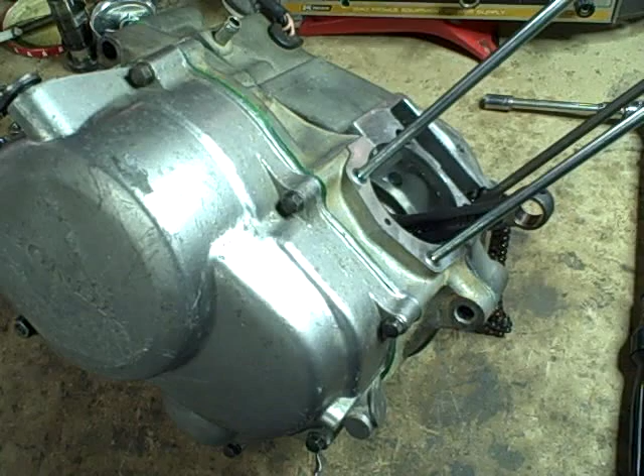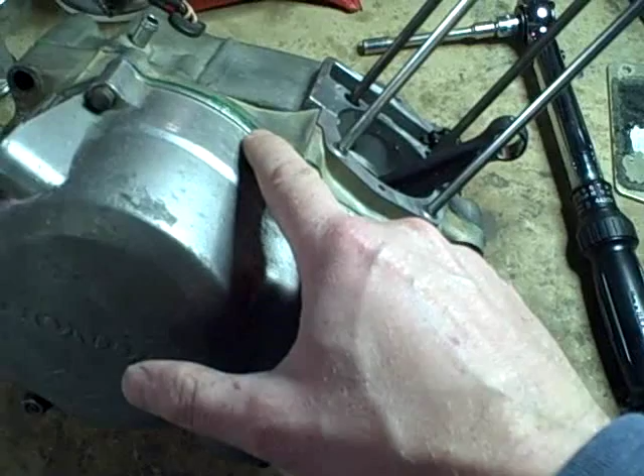Time to finally get back to work on the XR100. Going to start assembling the top end today, or tonight I should say. Last thing I ended up doing on this thing was after the RTV sealant set up, I gave a final torque to all of these small bolts right here, and those get torqued to 10 Newton meters or 7 foot-pounds, which is like 84 inch-pounds. So now I'm going to get ready to assemble the cylinder.

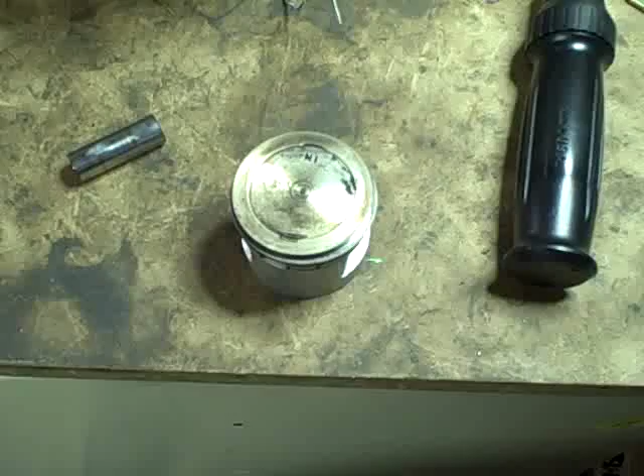Alright, so the first thing I need to do is I need to remove the old piston rings. Okay, I've removed all the rings, and now I've cleaned the carbon off the top of the piston. The rest of the piston looks like it's in pretty good shape. I'm not going to bother miking it because no matter what I get, I'm going to reuse this piston because I'm doing a cheap repair on this bike. Don't want to sink much money into it.

Anyways, next step I want to do is I want to clean the grooves for the piston rings, and the easiest way to do that is to take an old piston ring. I'm going to snap one of these old piston rings and use it as a scraper to get in there and get any carbon that might be in those grooves out, although it doesn't really look like there's any sign of it, but we'll do it anyways.

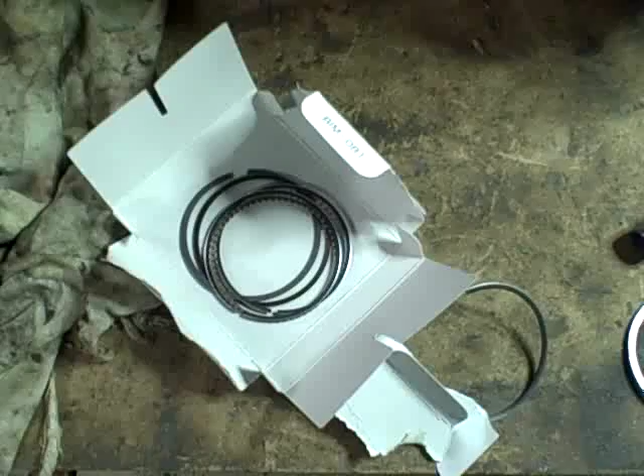When I've done piston ring replacements before and bought the sets, they were nice enough to individually wrap the rings in separate envelopes indicating whether it was the top ring or the second ring. Here they're just all thrown together in one little pile, so that's not going to tell me anything. And then to make matters worse, it does appear like there is a difference between the two rings here. One ring looks like it's of a different material, or at least has a coating on it that's different than the other ring.

Okay, just looked at them under magnification, and it's very hard to see, but there's a tiny T near the ring gap here on each one of these. So I'm going to make the assumption that T stands for top. So that must tell me which side faces up. Now I've just got to figure out which one of these rings is which. So I'm going to clean up the two original rings and see if I can see a difference.

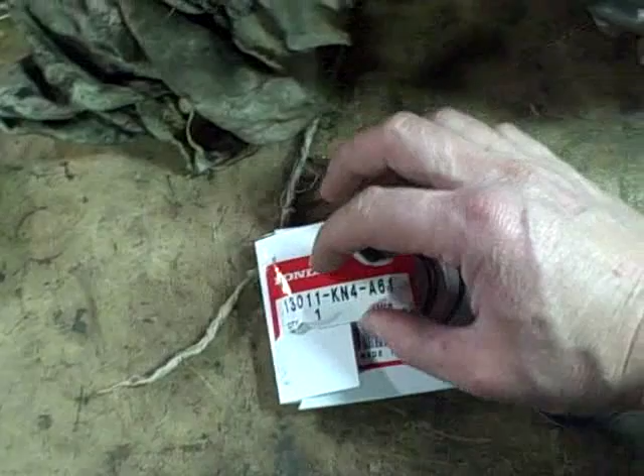So now I've got to go and double check and make sure that I got the right rings, because if I didn't, then I think the 23 bucks I spent on rings is going to be wasted. So I've got to double check this part number, 13011-KN4-A61, and make sure that these are the correct rings for this bike.

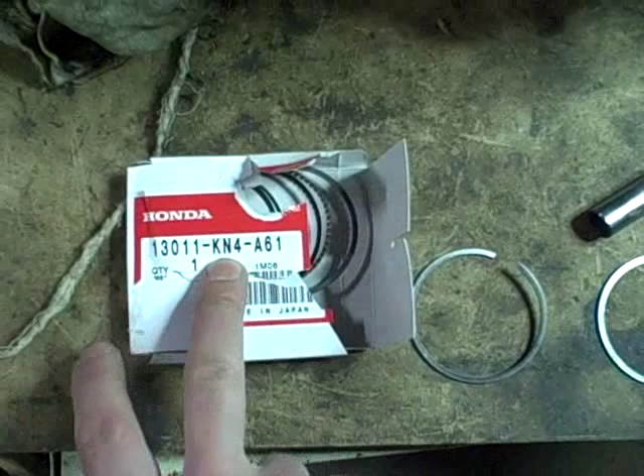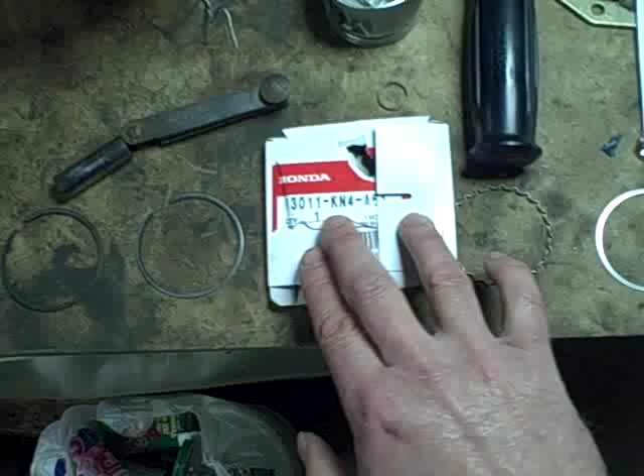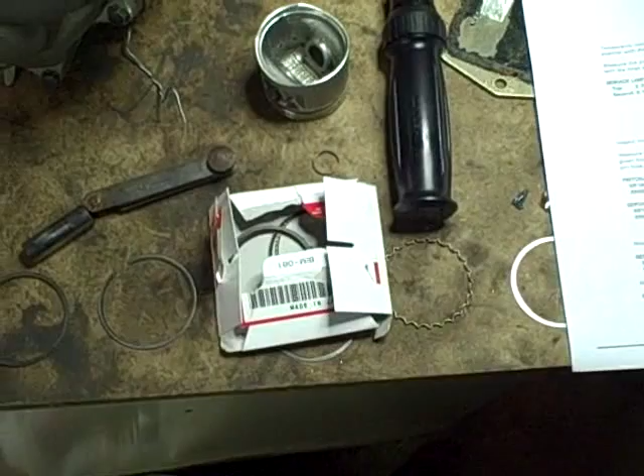Well, it looks like I got to the bottom of this piston ring problem over here on this XR. These piston rings that I had ordered, the 13011-KN4-A61s, are supposed to be the correct piston rings for a 2003 XR100. From 2001 on up through the whole XR100 lifespan, even when they changed over to the CRF100, they used these rings. Back in 2000, they used a different ring.

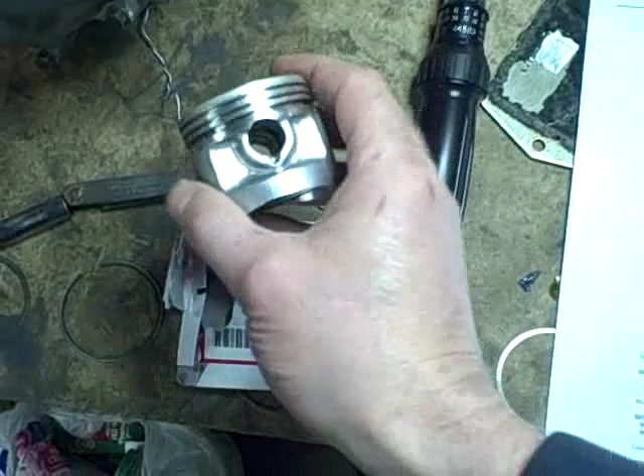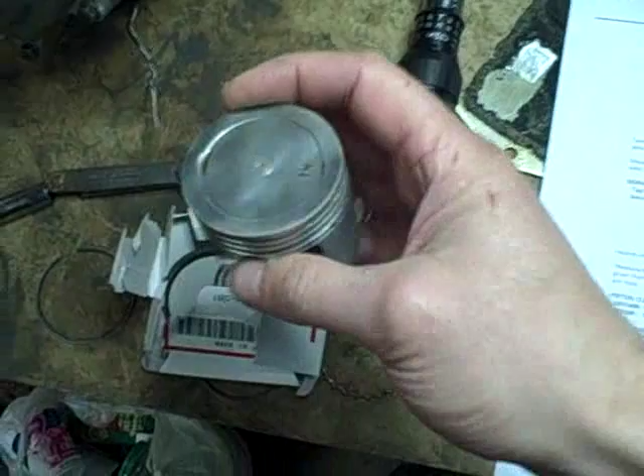What we found out was when I posted some high-resolution photos of this piston on a website, one of the experienced Honda guys noticed that there is a 436 number stamped right on here, and first thing they noticed was that this is an original Honda piston. It's not aftermarket, so that answered that question. And he noticed the 436 number, which he said is the middle part of the part number for the model year 2000 piston. So then when I looked up the model year 2000, it uses different rings.

So what we've got is a 2000 piston and an 03 motor. Either that, or for all I know, this whole motor is a 2000 motor that was put in an 03 bike. Anyways, called the distributor that sold me the rings. They said they'd take the rings back.

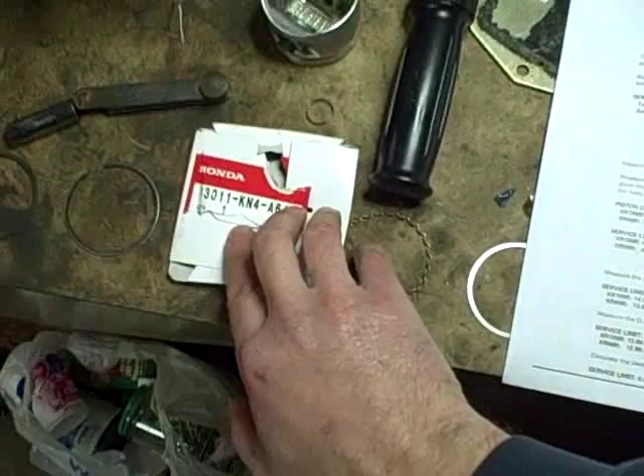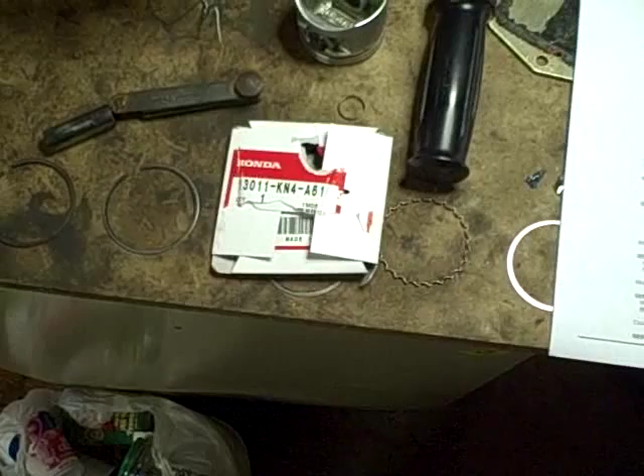I can send the rings back to them, and they won't charge me a restocking fee provided that I order the new rings from them online, which I was going to do, and the rings were about 24 bucks. And then when I went to check out, I realized they were assessing me $16 to ship them UPS ground. They're in Michigan, but I think that was probably going to be an order direct from Honda, drop ship from Honda. They said they didn't have them in stock, so I would have to wait for them from Honda, and I'd have to pay another $16 on top of the 24.

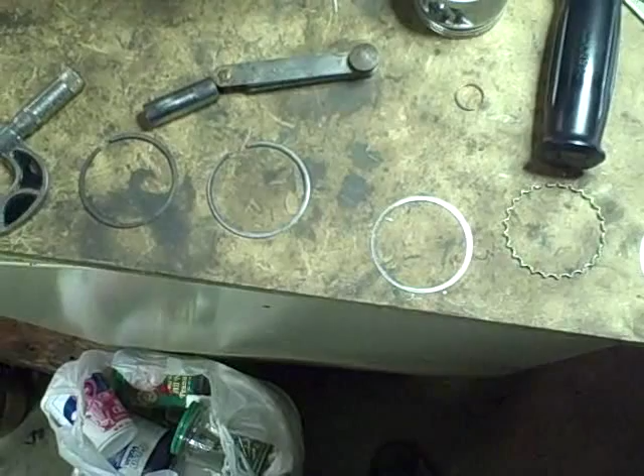So now all of a sudden, I'm paying $40 for rings for the thing, and I just kind of got disgusted by that whole issue. And so I've decided to do what a lot of people probably would not do in my situation, which is I'm going to put the old rings back on. I'm tired of dealing with this thing. I just want to put it together and see if it runs. So that's what I'm going to do.

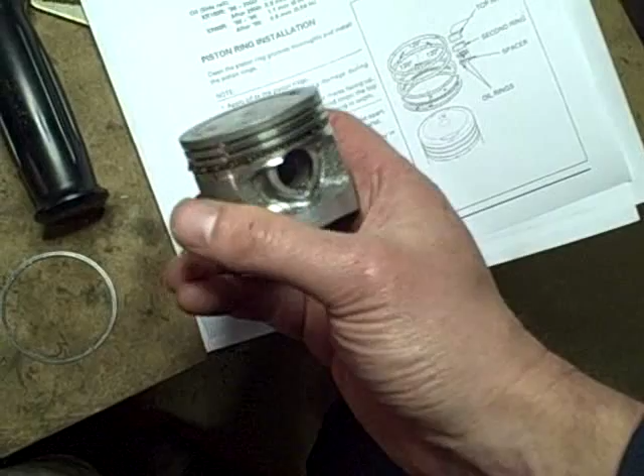Okay, so the first ring to get reinstalled is the center section of the 3-piece oil control ring. So that gets put on, and then the 2 other pieces of the oil control ring get put on. And then you want to make sure that all 3 of the gaps on those 3 sections aren't lined up with each other. So you want to put them slightly off from each other, maybe about 15 or 20 degrees off from each other.

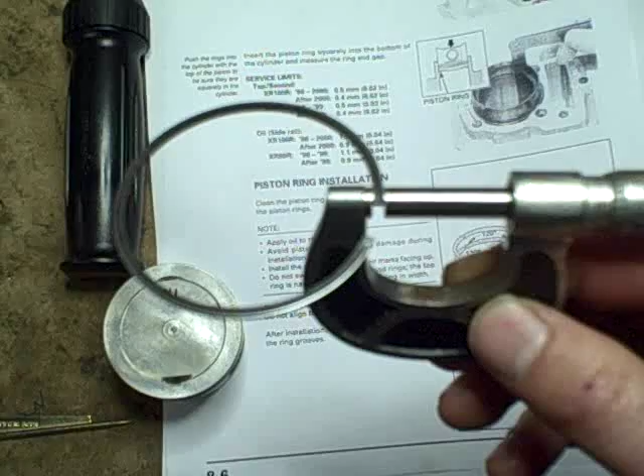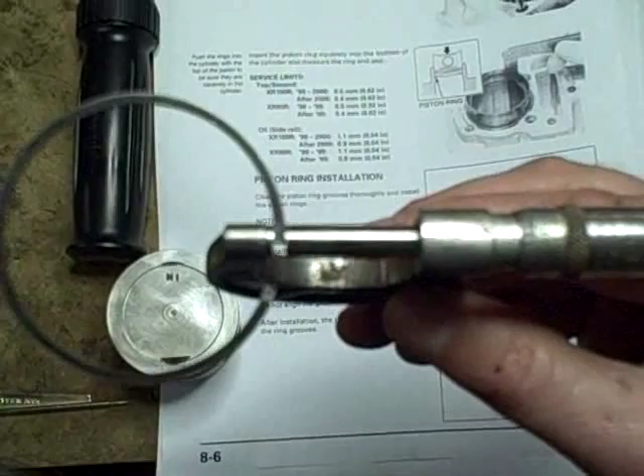Now here in the notes it says, do not switch the top and second rings. The top ring is narrower than the second ring in width. So I've got to figure out which one is the top ring, the narrower of the 2. Alright, so the top ring is definitely this one. This one is definitely narrower, even though they're the same thickness this way. Where I'm measuring them right now, I'm measuring the width. This is the narrow one, so this is my top ring. Okay, I've got the second ring installed. There is a tiny N on the ring, which would indicate the side that faces up.

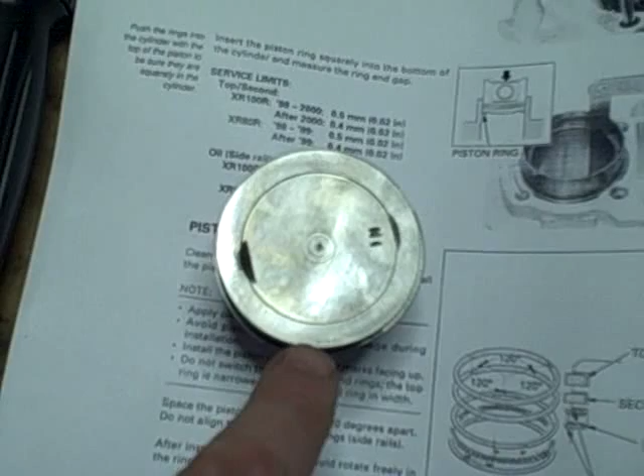To get them 120 degrees apart, basically if you imagine this as a whole pie, you want to divide the pie into 3 pieces. So you have a Y-shaped cut on the top. And you're going to have one gap in this position. That's the center part of the oil control ring. And then the second ring is here, so my 3rd gap is going to be right here. So I'm going to install the top ring now.

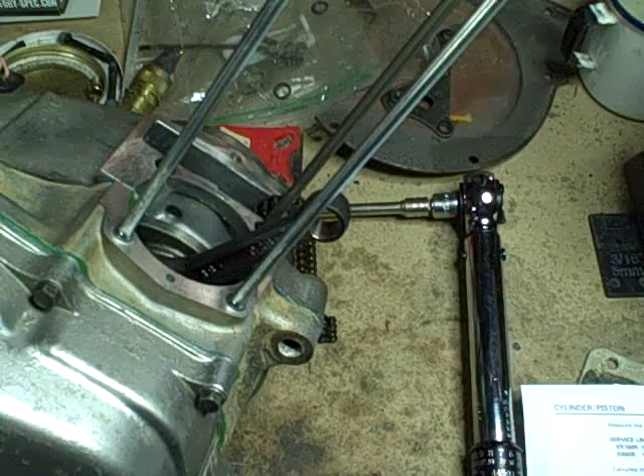Okay, I'm going to install the piston onto the connecting rod, but first, before I do that, I'm going to put some lube on the inside journal here of the top of the connecting rod. I'm going to lube the wrist pin before I reinsert it into the piston assembly. I'm also going to lube the piston all up. Okay, you want to make sure when you put your piston back on that the side that says in is facing towards the intake. So with the motor installed on the bike, the carburetor would be over here, so this is my intake side.

So I'm going to put the piston on, and now my next step is I'm going to insert the little clip, the retaining clip that holds the wrist pin in. But before I do that, I'm going to wrap a rag around this so that if I drop that little pin, it doesn't fall down inside my freshly assembled motor.

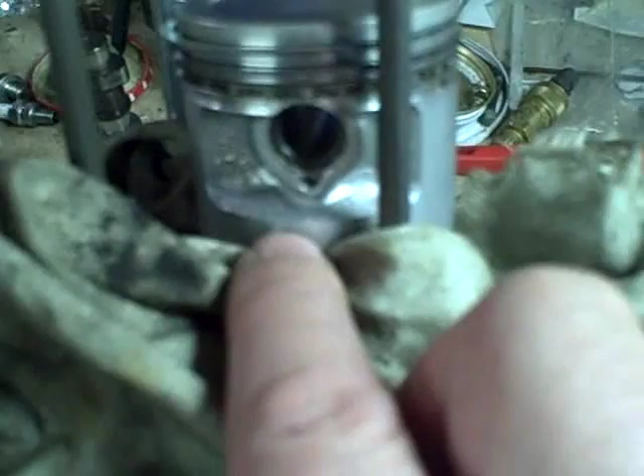Alright, it can be a little tricky sometimes to snap that clip in, but you want to make sure that you actually have it fully seated and snapped into the groove, because you certainly don't want that coming out and ruining your motor. And then also the little end gap in that little clip, you want to make sure that it hasn't ended up in this area here where you would apply the pick tool to remove that clip later.